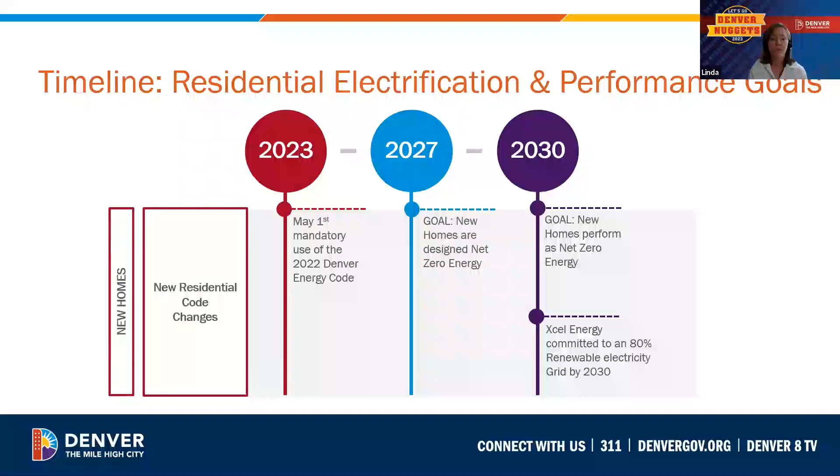You will find the 2022 Denver Energy Code at denvergov.org/buildingcode. A package of proposed changes to the code is posted there. It's anticipated to get City Council approval later in June, now scheduled for the 20th. The updates are primarily housekeeping in nature, and this presentation has a preview. Please do check back to the website for the latest code and updates to resources.

The Denver-specific ComCheck and ResCheck are anticipated to be available in fall of 2023. Another place where you'll find resources is at the Net Zero Energy Hub at denvergov.org/energycode. This has a recording of this presentation, as well as other resources for specific provisions, compliance options, and other training materials. More resources are being added, so please be sure to check back.

So tips for referencing the code: you're going to hear us use a single reference to a code section in the 2022 Denver Energy Code. This is because the 2022 Denver Building and Fire Code adopts the base code as reference. It's good practice to check Denver's code first to see if there are additions, deletions, or modifications to a section, and then also reference the base code. Also, Chapter 11 of the Denver Residential Code is replaced in its entirety by the residential provisions of the 2022 Denver Energy Code.

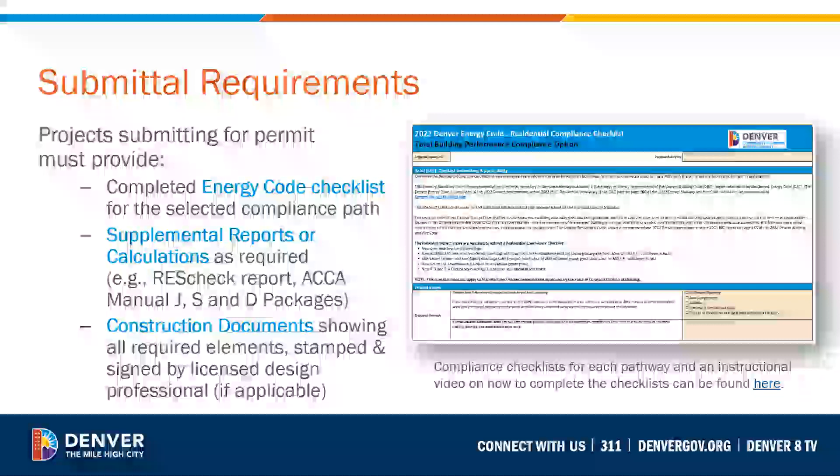Some of those submittal requirements are these compliance reports that could be your RES Check report or cost compliance report or energy rating index compliance report, as well as your HVAC design documents, your Manual J, S, and D. In addition, your construction documents need to be complete and house all of the required elements, and also be stamped by a licensed design professional.

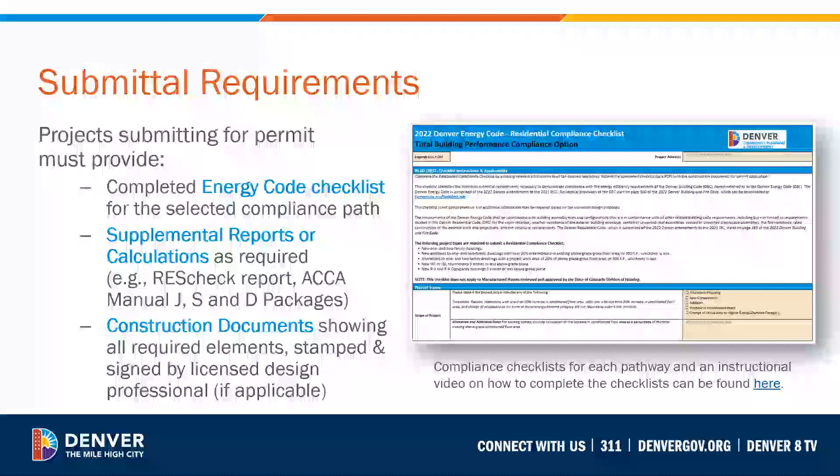Some of those additional compliance requirements that have to be on those construction documents would be, for example, a depiction of the building thermal envelope, air sealing details, and those types of things that we'll be talking about in more depth in the upcoming inspection and contractor trainings that start off on June 22nd and also on June 29th, pretty much at the same time that this presentation happens, around 1 o'clock. So make sure you sign up for those and listen to them.

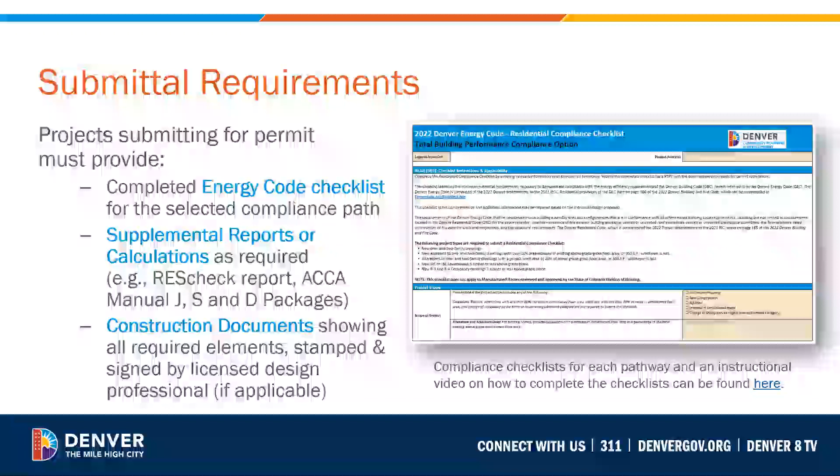Even if you aren't a contractor or an inspector, it'll give you a better idea of the full scope of inspections and requirements needed on your construction documents. Now, before we get to that, I wanted to note that the Denver Energy Code amendments now better define what an approved third party is. An approved third party is allowed to inspect your project, and if you choose to use a third party, you're now eligible for a discount of $150 on your permit fee. Third parties are most often used when demonstrating compliance using the performance option of the code, because compliance reports have to be turned in not only for the building permit, but also to issue the certificate of occupancy.

These compliance reports use the specifications and the building performance testing data that are actually achieved in the field in a second energy model to create what we call the confirmed compliance report that you need to turn in for that certificate of occupancy. We'll be discussing this all in a lot more detail during this presentation.

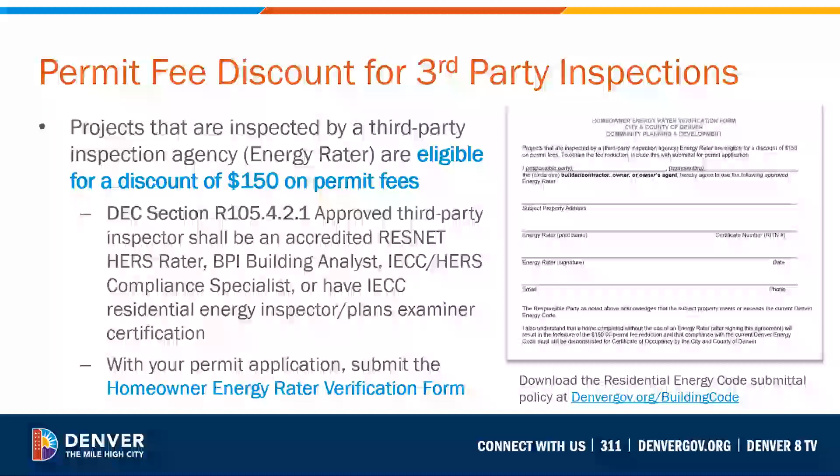Those wishing to be an approved third party need to contact the city of Denver, and those projects wishing to do the energy code inspections through a third party will need to submit a document called the Homeowner Energy Rater Verification Form with their permit application. A picture of that document, the Homeowner Energy Rater Verification Form, is shown on this slide.

Now, those construction documents, again, are documents that the plan review team utilizes to help guide the inspection process. So a lot of the information on those construction documents is included in the permit scope of work text box for the inspectors that go out into the field. The documents need to include the compliance pathway, for example, so that can be noted in the scope of work text box notation, so that the field inspection team knows exactly how to inspect that home and what to inspect it for.

Some of the additional information that needs to be on those construction documents, for example, if you're using the prescriptive pathway for compliance, would be additional energy efficiency packages, and regardless of the compliance pathway, whether you're putting renewable energy systems on the house, and whether that house or property is an all-electric property or not.

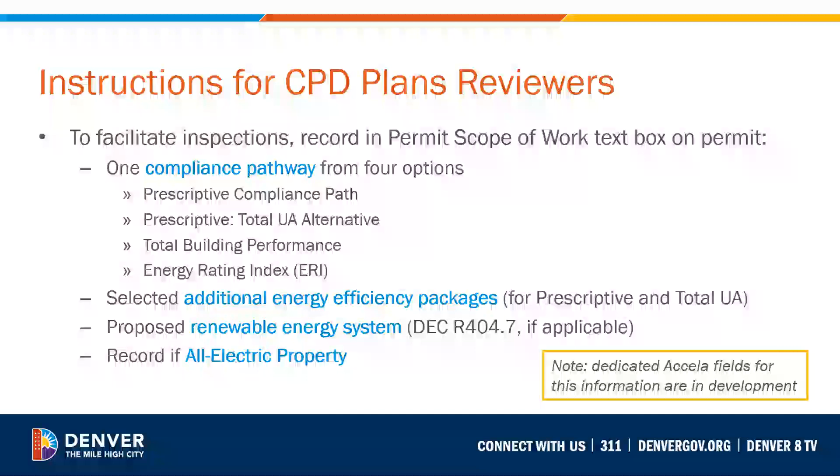Because the building performance options utilize an energy modeling process, we're going to talk a little bit more in depth about what energy modeling is and the result of energy modeling, which is these trade-offs, what they are and how they actually work.

There are a number of energy modeling softwares available that you can use to demonstrate compliance with the total building performance pathway and also the energy rating index, or ERI, compliance pathway. What you need to know is that ResCheck is not one of them, as it can only be used to model compliance for the total UA alternative compliance option.

You also want to note that you're likely to be confused a little bit when you enter the ResCheck software because they have this kind of quasi performance compliance option. But I want to be really crystal clear that that performance compliance option within ResCheck does not model for the total building performance approach or the energy rating index compliance approach. So you want to be sure to stay away from that if you're choosing these compliance options.

There's another software out there called Energy Gauge that can do this modeling for total building performance and energy rating index. But that software is really only used in Florida and some of the southeastern United States, and it's really unlikely that you're going to see it in Colorado.

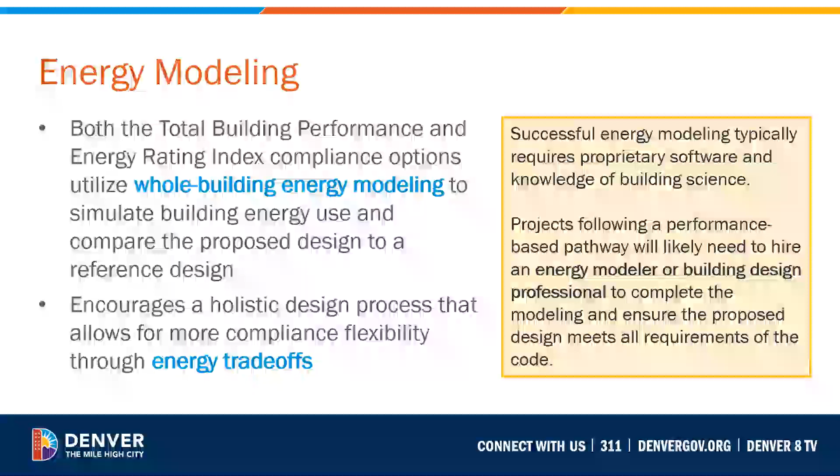The energy modeler who performs this will probably be an approved third party, and depending on the performance compliance option you choose and the software used, it will most likely be an energy rater.

These trade-offs refer to putting more into one assembly so you can put less into another, while keeping a balanced scale or energy budget that is deemed compliant with the code. When using performance approaches, you're allowed to trade off more things than you normally would with prescriptive approaches.

The area weighted U value prescriptive approach does allow you to trade off U factors and R values, but the performance approaches not only allow that, they also allow you to trade off air tightness, duct leakage, and systems and appliance performance, depending on the approach you're trying to achieve.

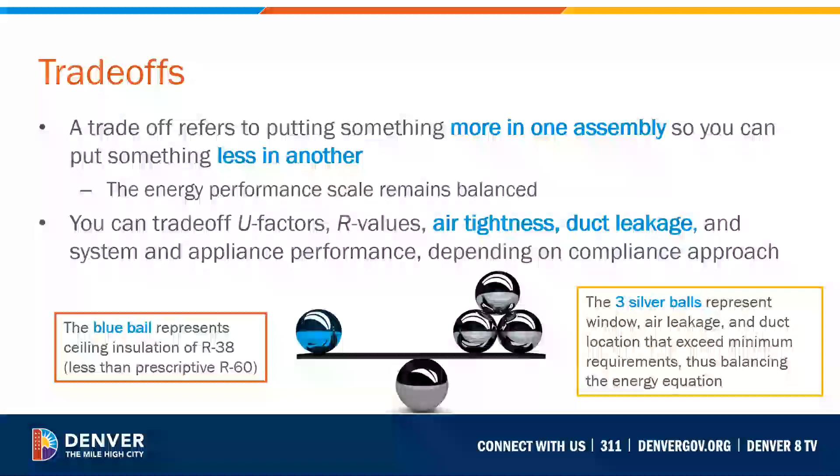When doing these energy models, we use software that describes the thermal building envelope and its delta T location to ambient air or dirt. The energy modeler starts by doing a takeoff of the building and inputting the square footage of each building assembly into the software.

In essence, they're rebuilding the house within the software, demonstrating where each assembly is placed with respect to its delta T location, in order to describe where the heat loss or heat gain is happening within that building.

When we talk about heat loss and heat gain, we're talking about the direction of heat flow. Heat flow always happens from higher concentrations to lower concentrations—you can think of it as from more to less, or from hot to cold.

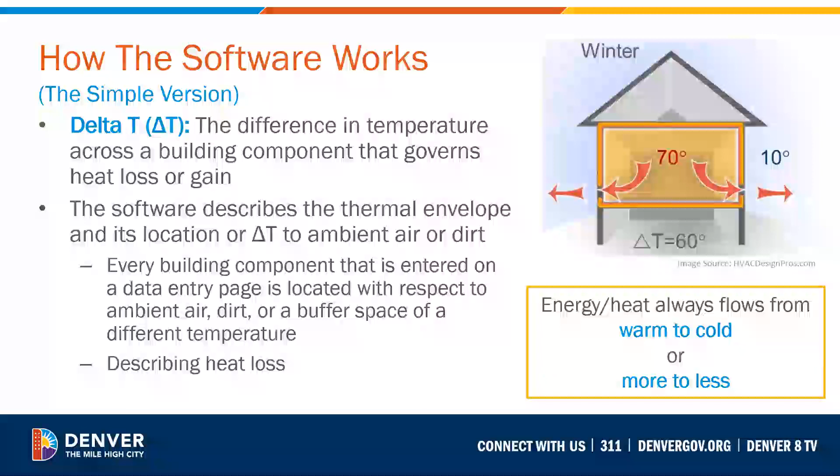In this way, the energy model describes and calculates the heat loss and heat gain through the building's thermal envelope for the entirety of the building being energy modeled.

Within the energy model, after you've built the house in there, the software takes over—it takes that geometry and builds two houses that are geometric twins of each other. One is called the reference home, and the other is called the rated home.

The rated home could also be called the proposed design or the builder's house. Because these two houses are geometric twins, the rated home is compared to the reference home, which is defined as a house with a standard set of specifications that generate a specific, consistent, and quantifiable amount of energy performance equivalent to code.

So the reference home is overlaid with the R value and U value specifications that are equivalent to code compliance.

The rated home is overlaid with the specifications that the builder and design team want to use, and they compare the rated home to the reference home to see if it's equal to or better than in performance. There are a variety of different metrics that can be used to determine if it's equal to or better than.

And that's ultimately what we're going to be getting at in each of the performance compliance options here. Now, there are a variety of different reference homes out there, and these softwares can demonstrate compliance with a lot of these different performance options or different performance pathways through the code.

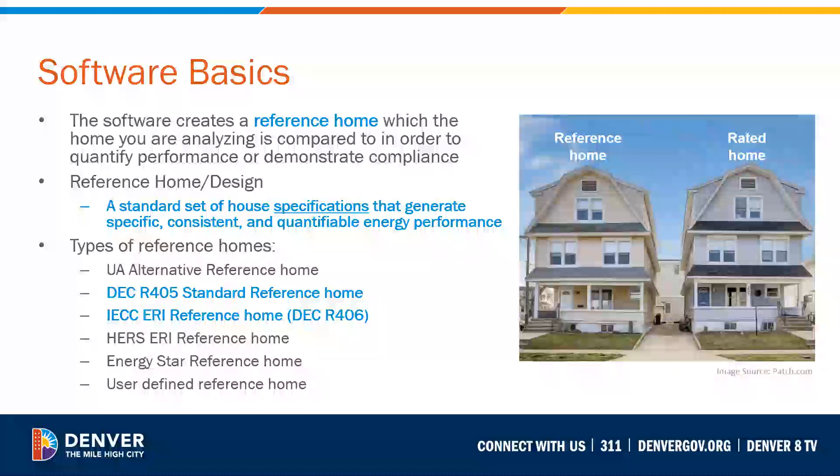But remember that if you're using the area weighted U value energy modeling approach, you can only use the REScheck software. That's the prescriptive compliance option that uses a software modeling approach. And if you're using the total building performance approach or the R406 energy rating index approach, you can use either the REM-rate software or the Ekotrope software or some of the other softwares that are out there to demonstrate compliance there.

Now, ultimately, this process creates a whole building or holistic energy model that helps us better understand the building science that's wrapped into the energy code, which helps us and allows us to perform greater trade-offs and gain more flexibility in how the home is designed and specified and ultimately built in relationship to the code specifications and compliance with the code.

So when we talk about flexibility that's built into the code, we're talking about using these performance approaches and the energy models to be able to determine that flexibility in how we design and specify the building thermal envelope assemblies.

Now we're going to jump into the first of these options here. You have the option to use the total building compliance option here. This section is in R405, and it establishes a criteria for compliance using total building performance analysis.

The analysis only includes heating, cooling, mechanical ventilation, service water heating use, and building assemblies or components that directly affect the energy performance of the building's thermal envelope from a heating, cooling, ventilation, and service hot water perspective there.

Now, this compliance option does not include mechanical or solar trade-offs. However, it offers more flexibility than the UA alternative because you can trade off more than just R values and U values that are allowed in that prescriptive energy modeling approach.

As you can see in the pie chart on the right of this slide, heating, cooling, and water heating are the largest energy demands of a home, and this is why the code concentrates on these areas and their impact on the building thermal envelope. So the code is always trying to protect the performance of the building thermal envelope there.

Within the energy model itself, two houses are developed that are geometric twins of each other. We have the reference home that I talked about before, and the reference home specifications for this compliance path are actually defined within the body of the energy code in table R405.4.2 parentheses 1 in the IECC.

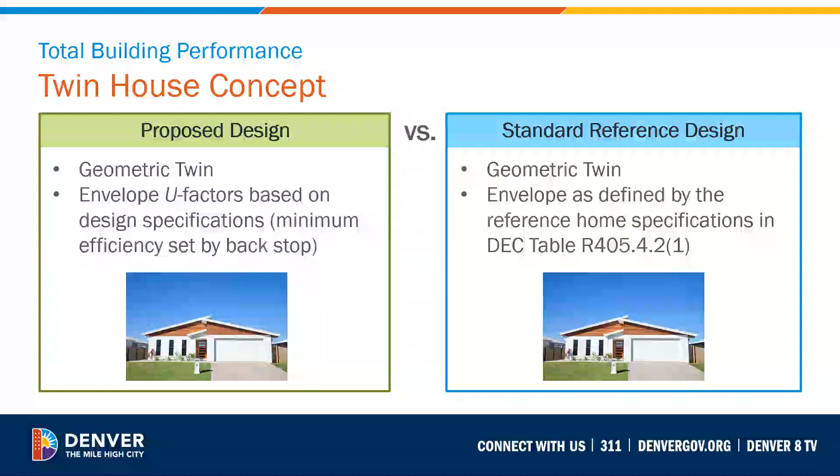For the total building performance compliance approach in the 2022 Denver Energy Code, it requires that all electric homes be 5% better than the standard reference design, and that all other buildings, or non-all electric buildings, in other words, be 18% better than the standard reference design.

The metric used for compliance to ultimately determine if the proposed design is better than or equal to that 5% or 18% is annual energy cost. So the result of the energy model is what we call a cost compliance report that will show you if the house is better than 5% or 18%, depending on how your project is defined there. And I'll show you those reports here in just a bit.

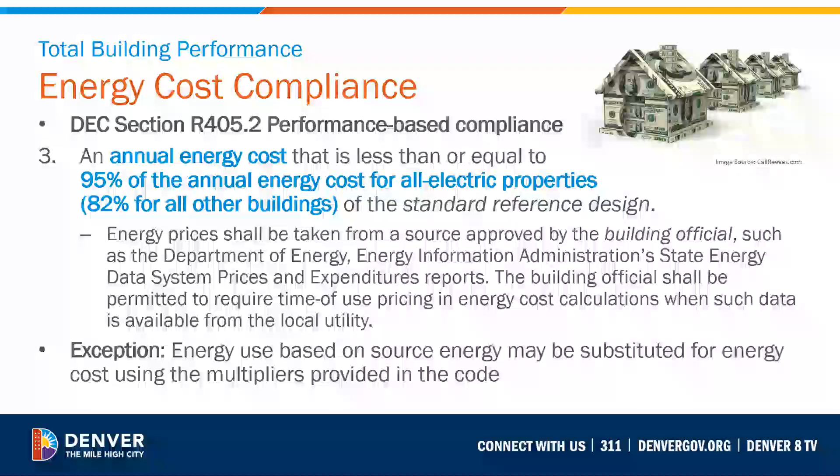The standard reference home design is what we're ultimately looking for here, and it's what you must be 5% or 18% better than, depending on the building and if that building is an all-electric property or not. Remember that the reference home design is printed in a table within the body of the 2021 IECC, so you can go take a look at it if you'd like to. The reference home is this standard set of house specifications that generate a specific, consistent, and quantifiable amount of energy use that is deemed to be compliant with the code.

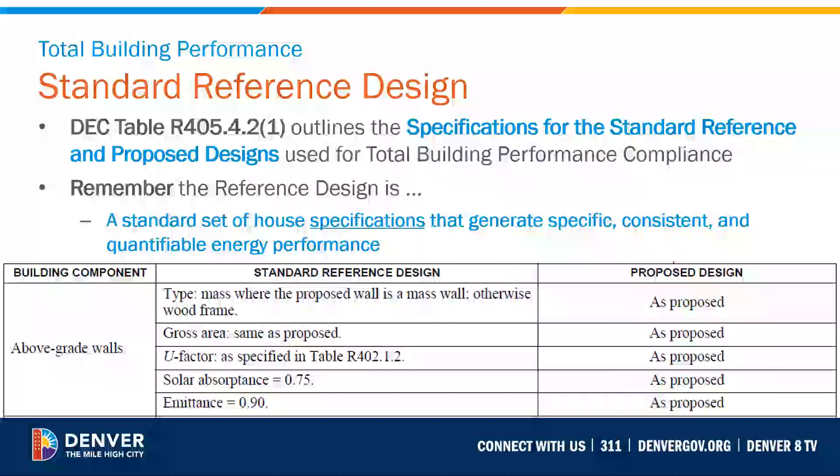This is what we're comparing our proposed design or builder's house to. So the builder or proposed design specifications must be chosen to demonstrate compliance that is either 5% better than, or 18% better than, depending on the project type that you're proposing to build to, and ultimately better than the reference home by those percentages.

So what does this mean for your project? The proposed design must first meet the requirements in table R405.2 that I'll show you here in a second, and comply with these backstops, meaning that you can't trade off below the building thermal envelope requirements described in the 2009 IECC. Now, this backstop ultimately and in reality is irrelevant to the Denver Energy Code, because the Denver Energy Code is using the 5% and 18% cost compliance requirements, depending on if you're building an electric home or a non-electric home.

But you want to be sure that you are specifying something that is better than the 2009 IECC R values and U values in those tables, just to ensure that you're not going to have any issues when it comes to looking at this compliance and the energy modeling that's happening there.

So lastly, you have to comply with the cost compliance requirements that help to incentivize all-electric properties. You can see that the non-electric property has to be 18% better than the reference home, versus the all-electric property that only has to be 5% better than the reference home. Therefore, they've set this up to incentivize people to seriously look at building all-electric properties within the city of Denver.

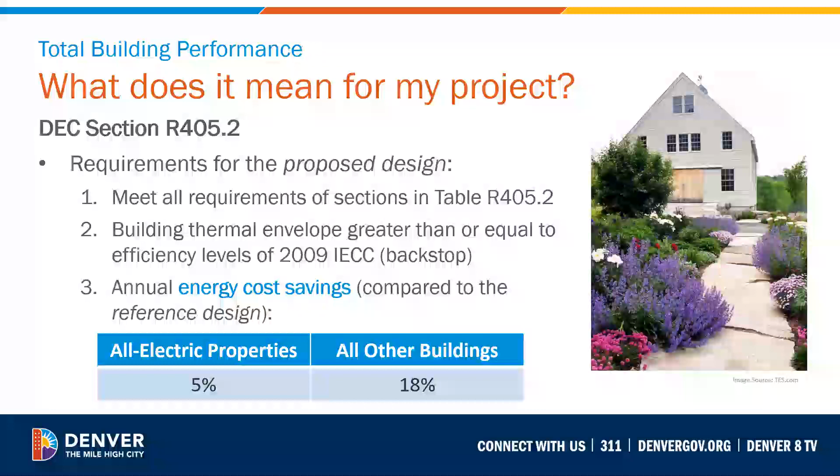So regardless of the compliance approach used for the project, there are these additional requirements from sections R401 through R404 that must be met. The 2021 IECC removed the language that describes requirements as prescriptive or mandatory, and they're now just listed out as requirements, per compliance option. In essence, you can think of them as mandatory requirements that primarily address installation-specific issues that deal with efficiency in the code.

Now, for the total building performance compliance option, they're listed in this requirements table. This is the R405.2 table here. We'll be speaking to these requirements in more depth again in the contractor training, which I recommend you take a listen to, or join us on June 22nd and June 29th.

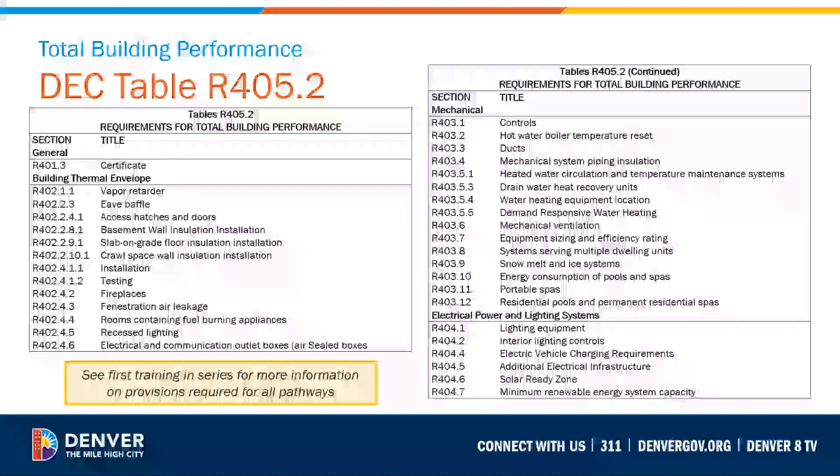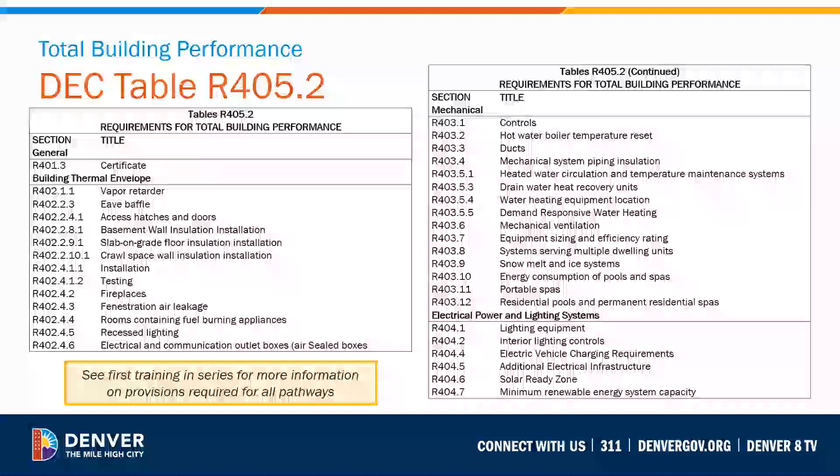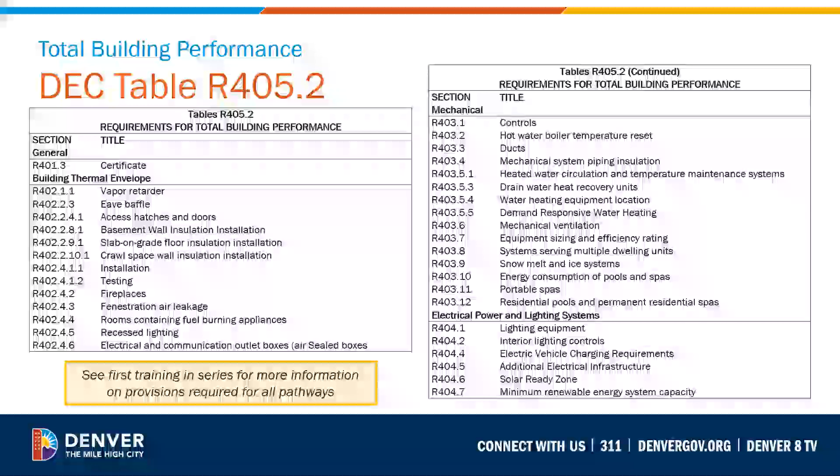Now, if you look at this table in depth, you can see why they got rid of the mandatory and prescriptive language. If you look in the left-hand column, you'll see attic eave baffles. Attic eave baffles used to be described in what was called the prescriptive section. So some smart aleck really thought that if they were doing a performance approach compliance for their house, and it had a ventilated attic, that they weren't required to install attic eave baffles because it didn't say mandatory on it. Now it's just really clear by using this table that all of these things are required if you're doing an assembly that would need attic eave baffles, like that ventilated attic, for example.

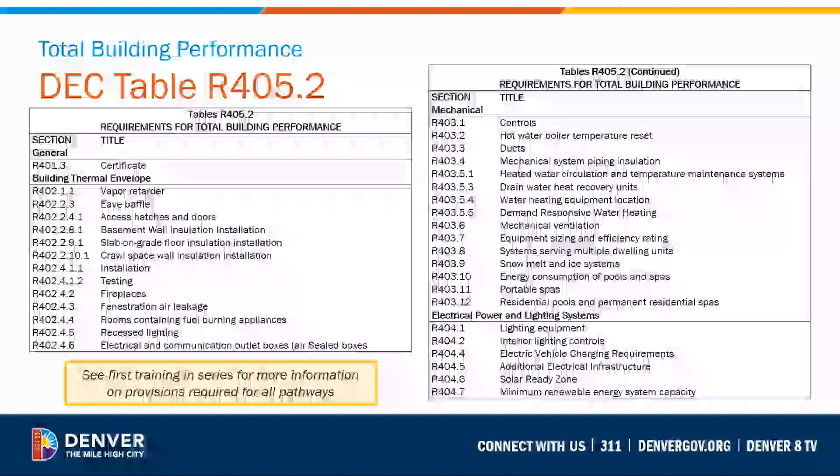The other thing I want to touch on again is the backstop. It's used in the total building performance compliance pathway, and it states that the building thermal envelope shall be greater than or equal to the levels of efficiency in the 2009 International Energy Conservation Code. Again, the Energy Code uses the backstops to protect the performance of the building thermal envelope from excess trade-offs. As I said before, it's unlikely that this will become an issue since your cost compliance requirements are 5% better than or 18% better than the reference home, using the R values and U values or U factor tables from the 2021 IECC. But regardless, it's smart to keep this in mind in case there's some unforeseen trade-off that complies on paper but may not comply in reality in the field during inspections.

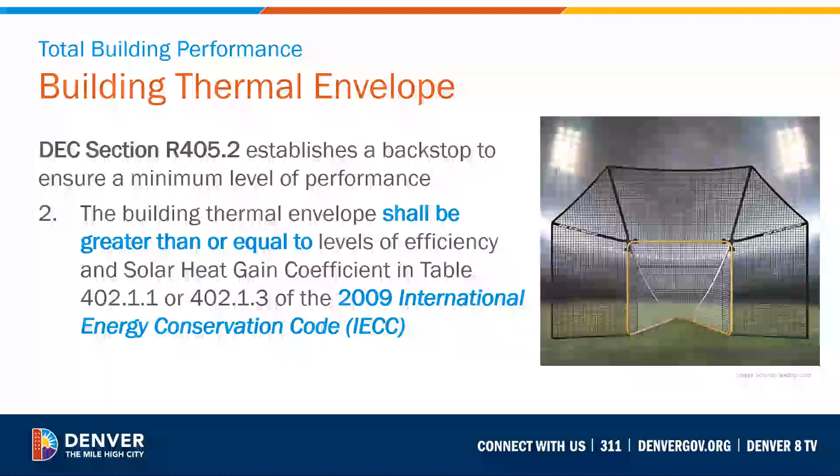I also want to point out that these additional efficiency packages in section R408 are only required for projects following the prescriptive compliance pathway, and are not required when using either the total building performance or the energy rating index compliance pathways.

The reason for this is that the additional efficiency that has been built into the code has been built in directly into the performance requirements for both the total building performance and energy rating indexes. Remember, in the total building performance, this 5% better than and 18% better than the reference home is a demonstration of how they've built this in already into the compliance pathway.

Note that the original printing of the Denver Energy Code in section R401.2.5, in the requirements table for both the performance approach and the energy rating index approach, these requirement tables R405.2 and R406.2 point to a requirement for additional energy efficiency, but that was a mistake that was written into the code and it's been removed. There's now an errata that's been issued to show clearly that that is not a requirement. The errata is supposed to be published soon on the City of Denver's website, and it's recommended that you download it and reference it when determining compliance for your project so you understand everything that's actually required.

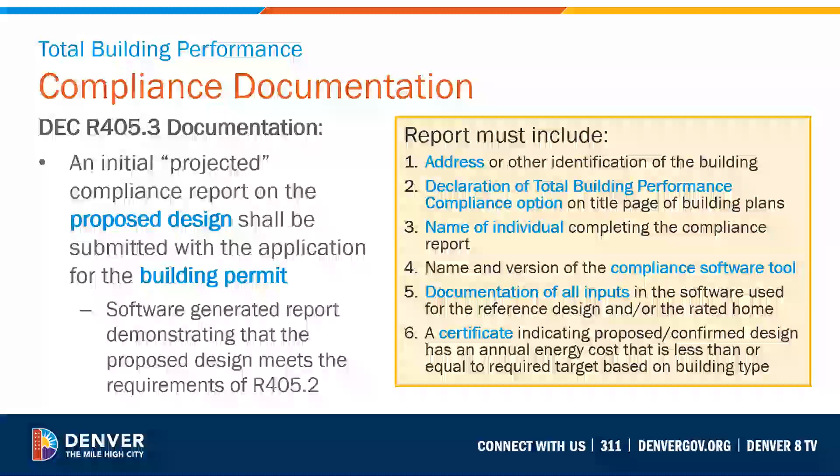Other things that have to be on the compliance report are shown here in the yellow box. Most importantly, a certificate indicating that the proposed and confirmed design has an annual energy cost that is less than or equal to that required by the Denver Energy Code, which is the 5% better than for all-electric buildings and the 18% better than the reference home for non-all-electric buildings. Also, we want to note that this has been set up to incentivize all-electric buildings.

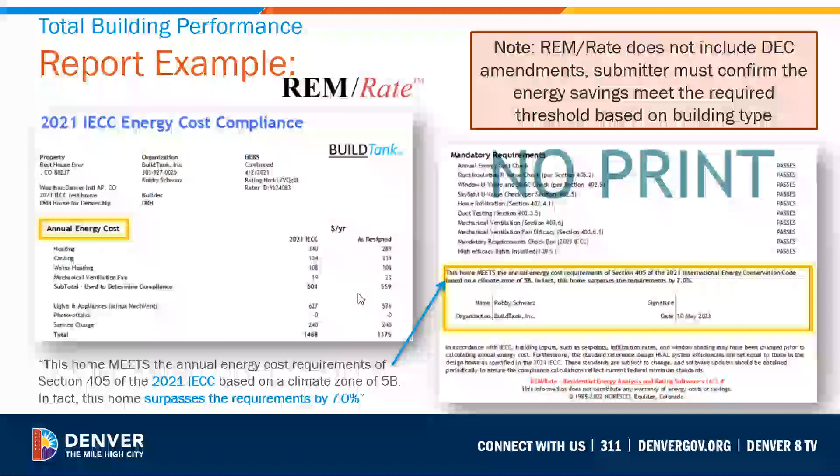Okay, so here's an example of a cost compliance report from the REMrate software. Note that this example home passes the 2021 IECC by 7%. Remember that this meets the requirements for all-electric properties within the Denver Energy Code, but would not meet the energy savings requirements for mixed fuel or non-all-electric homes. Also note that neither the REMrate nor the Ekotrope software has been modified to include the Denver Energy Code amendments. So this is one fundamental reason why the 5% and the 18% levels of performance have been set within the Denver Energy Code: it allows the use of software without having to customize it to a code adoption and its amendments. In addition, the Denver Energy Code amendments to the cost compliance requirements provide better equivalency between compliance options, and help the City of Denver meet its zero carbon and zero energy goals.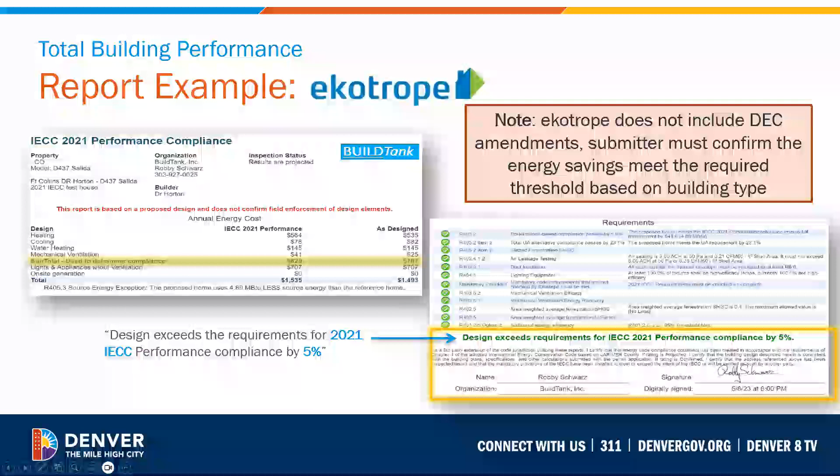An additional compliance report is required when using the total building performance compliance option. This actually requires two separate reports that can be printed out from these softwares: one that outlines the inputs and specifications used to create the reference home, and another that outlines all the inputs and specifications used to build the rated home or the proposed design.

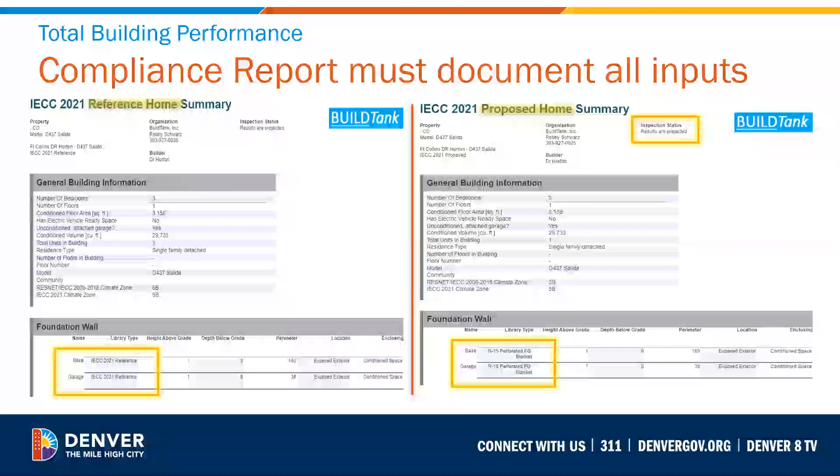These reports shown here are from the ekotrope software and also need to be labeled as proposed or confirmed. You can see in the upper right-hand corner of the document on the right that it's showing the results are from the projected or proposed design. I should point out that projected has the same meaning as proposed.

In addition, the R401.3 certificate can be printed out from these softwares. This report must be posted in the house as part of the compliance reports needed to obtain the certificate of occupancy. Notice that on this slide, the report on the right was not generated by a software.

When using the prescriptive R-value or U-factor compliance option, this option does not use a software, and therefore you don't have the option of printing out this R401.3 certificate from a software. Therefore, the certificate itself has to be hand generated. This particular one uses Microsoft Word, but you're likely to see a lot of different options out there to generate this certificate. In fact, the City of Denver has a template for the R401.3 certificate that you can use to generate the certificate and turn it in to the City of Denver and post it in the house.

Note that section R401.3 states specifically what has to be on the certificate. So if you do generate it yourself, you want to make sure that you have all the requirements that need to be listed on that certificate listed on the certificate.

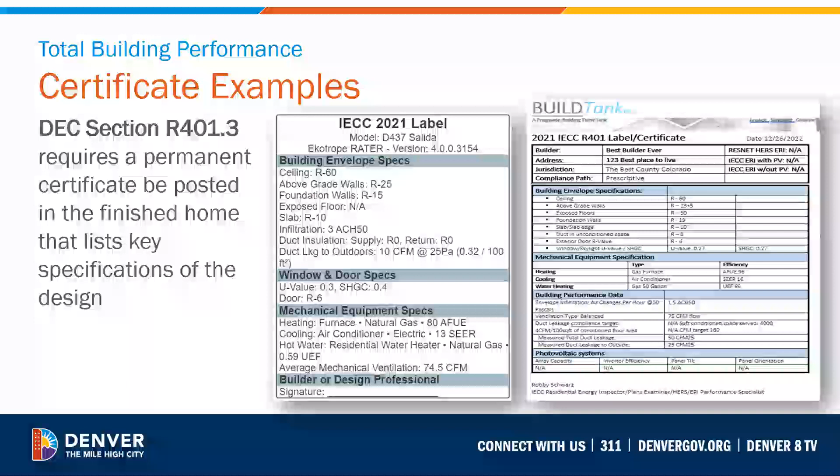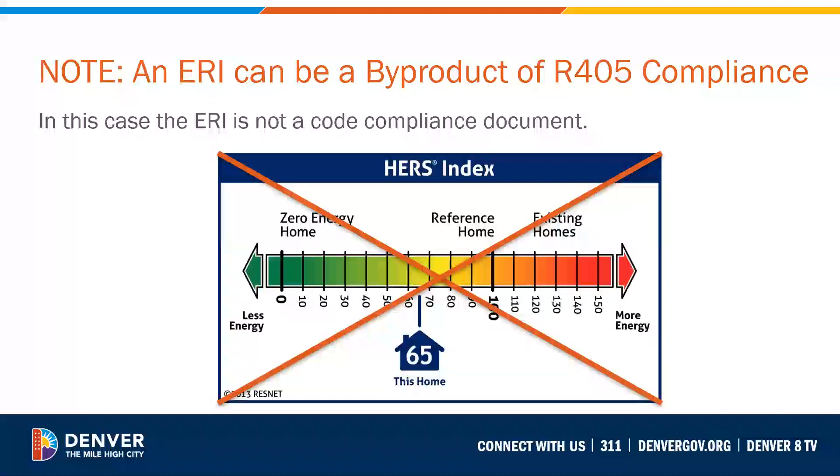When you're utilizing a software to do the building performance approach for compliance, it's likely that software can also be used to do the energy rating index compliance, or just generate an energy rating index score. I want to be clear here: if you're choosing to use the R405 building performance compliance option, you should not turn in anything that has an energy rating index score on it. It just confuses everybody and creates confusion about which compliance option you're actually trying to use. So again, do not turn in anything that has an energy rating index on it if you are choosing to use the R405 total building performance compliance alternative or pathway.

Sorry about that, you might hear a phone ringing in the back.

Upon completion of the building, a confirmed compliance report based on the confirmed condition of the building has to be submitted to the code official before a certificate of occupancy is issued. The confirmed compliance report is your final site-specific code compliance report that includes any information obtained during the inspection process of the home, such as the actual blower door test or duct leakage testing results.

It can also include any insulation specifications that may have changed between the proposed design submission and the final confirmed report for certificate of occupancy. Generally speaking, if you install more than you specified on the proposed compliance documents, you'll be okay. But remember, if your specification changes a lot from what you turned in at submission to the final, or includes specifications that are less than the proposed design, you may run into a big problem at final. So you want to follow your design as much as possible, although we know things sometimes change during the construction process. You'll want to bring that up as soon as possible.

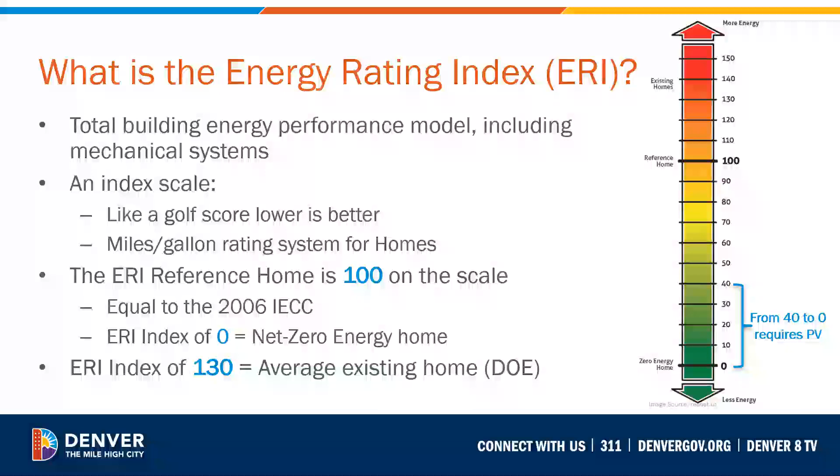I've also seen houses that perform really poorly. I think the worst house I've seen scored about 300 points on the energy rating index scale, significantly worse than the average existing home in the marketplace.

The energy rating index was first added to the IECC compliance option in 2015 at the International Energy Conservation Code development hearings. They used the name energy rating index, or ERI, because the term HERS, or home energy rating system, is a proprietary term, and proprietary terms can't be used within the body of the code. However, in the 2015 IECC, the energy rating index score was developed using the ResNet HERS standard, even though it was not specifically referenced in the code, because the reality was there was no other alternative to use.

Between the 2015 IECC and the 2018 IECC, the organizations ANSI, ResNet, and the International Code Council created the ANSI Standard 301, which outlines how to develop an energy rating index score. The energy rating index became non-proprietary because of this ANSI Standard 301, and ANSI Standard 301-2014 was adopted for use in the 2018 IECC. The ANSI standard is now used to create both the IECC and the ResNet HERS energy rating index score.

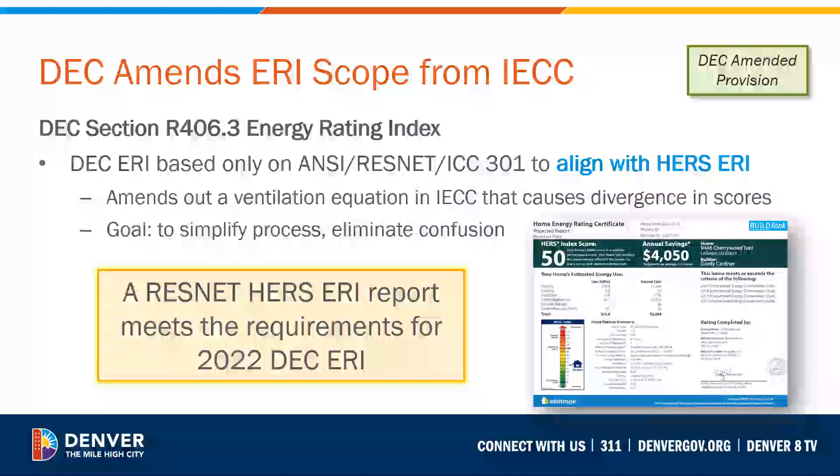So to be really crystal clear, the ResNet HERS energy rating index score is the compliance score used by the Denver Energy Code. I just want to repeat that one more time: the ResNet HERS energy rating index score is the compliance score used by the Denver Energy Code.

So how is the energy rating index score developed in the software? Remember that within the software we have two houses that are geometric twins of each other, created after we've done a takeoff and built that house in the software. You have the proposed design, which is compared to the reference home. The reference home is overlaid with the specifications required by the ANSI Standard 301, which is equivalent to the performance created by the 2006 International Energy Conservation Code.

The proposed design uses the specifications that the builder or designer has specified for that house. The objective is to get an analysis to benchmark the proposed design on the energy rating index scoring system in relationship to the ANSI 301 reference home, that 2006 IECC house. In other words, we want to know does the proposed design perform better or worse than the reference design, and what is its actual score?

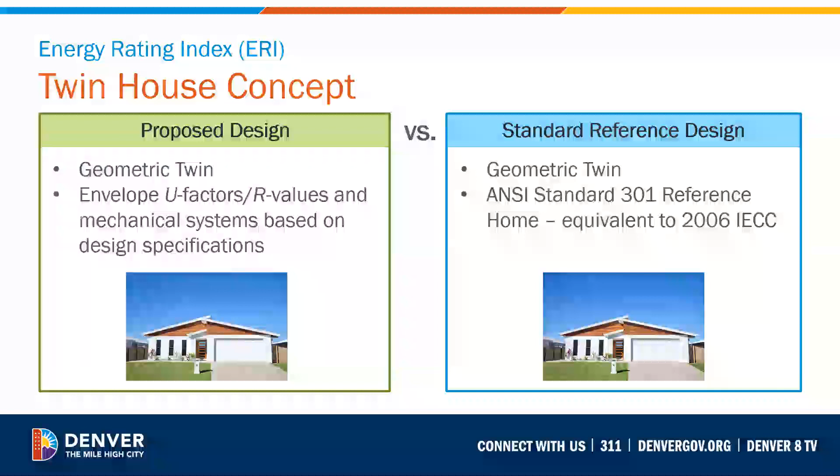So what this means for your project is that the specifications for your proposed design need to perform significantly better than the 2006 IECC. In fact, they need to perform well enough to achieve an energy rating index of 55 or less for an all-electric home, or 50 or less for all other properties or non-all-electric homes. In addition, your project will have to comply with the requirements listed in Table R406.2, which are specified in sections R401 through R404 that all compliance options have to comply with.

So remember, I said that if you maximize the envelope and mechanical efficiencies in the house, you can only get to an ERI score of about 35. The remainder of the pathway to zero is achieved by adding renewables, such as PV panels. Because of this fact, the Denver Energy Code set the required energy rating index scores at 55 or less for all-electric homes and 50 or less for non-all-electric homes.

Also remember this means you have to achieve those energy rating index scores without including renewables in the energy model. So before renewables are added to the energy model, you have to achieve your 55 or your 50 or better, depending on the type of project you're building. This creates a natural backstop to protect the efficiency of the building thermal envelope and offers a more defined path to meet the city's zero energy goals, as well as room to lower the energy rating index score requirements in future code cycles in order to ultimately meet those zero carbon and zero energy goals in the future.

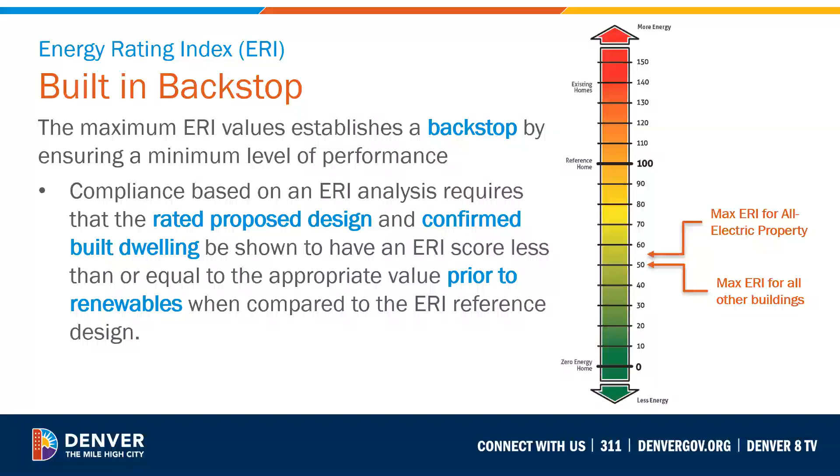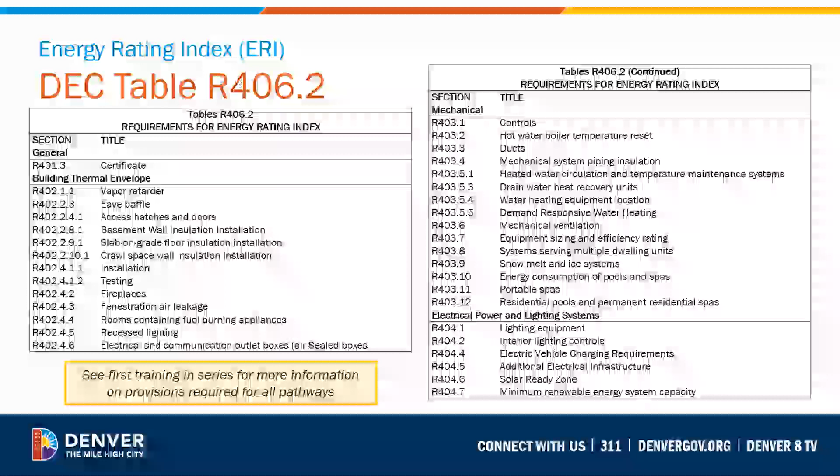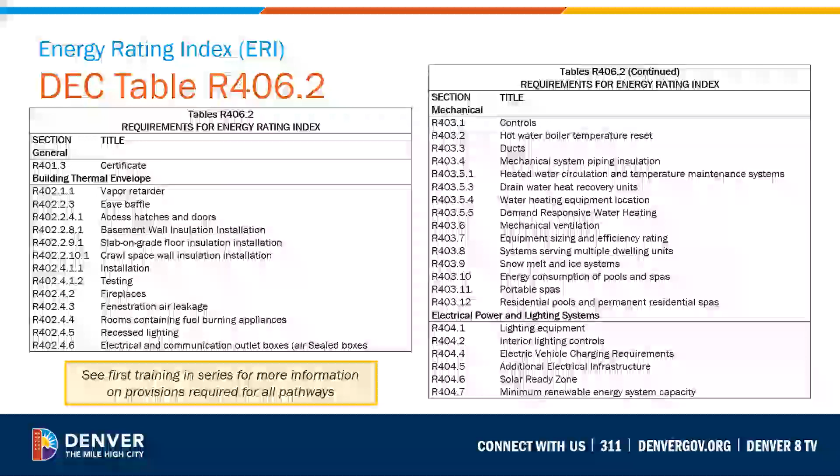Here's the R406.2 table, which lists all the requirements that are applicable in sections R401 through R404 for the energy rating compliance pathway. Remember that the 2021 IECC removed the language that described requirements as prescriptive and mandatory. They are now just requirements.

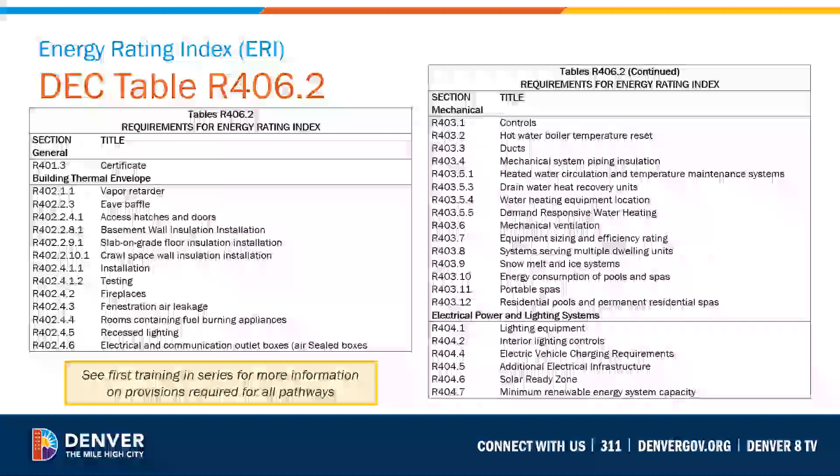You can think of them as mandatory requirements that primarily address installation of specific efficiency measures embodied within the language of the code. We'll be speaking to these requirements in more depth during the contractors training, and I encourage you to take a listen to those trainings happening on June 22nd and June 29th, or listen to the recordings posted on the Denver website.

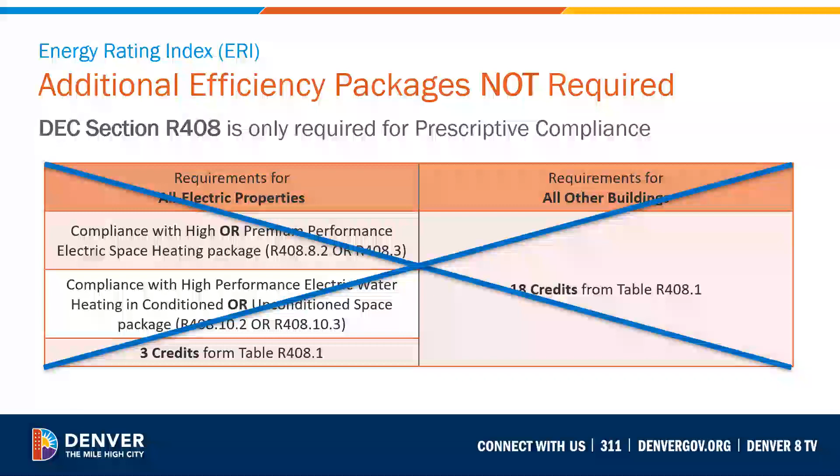Also, I want to remind you that the additional efficiency packages in sections R408 are only required for projects following the prescriptive compliance pathway, and are not required when using either the total building performance or energy rating index pathways. As with the total building performance compliance path, you'll have to submit a proposed design compliance report to obtain the building permit when using the energy rating index compliance option.

The reason for this is that the energy model is basically using assumptions such as how leaky the house is, because this information isn't available at the time you're permitting the house—the house isn't complete yet, and those tests haven't actually been done yet.

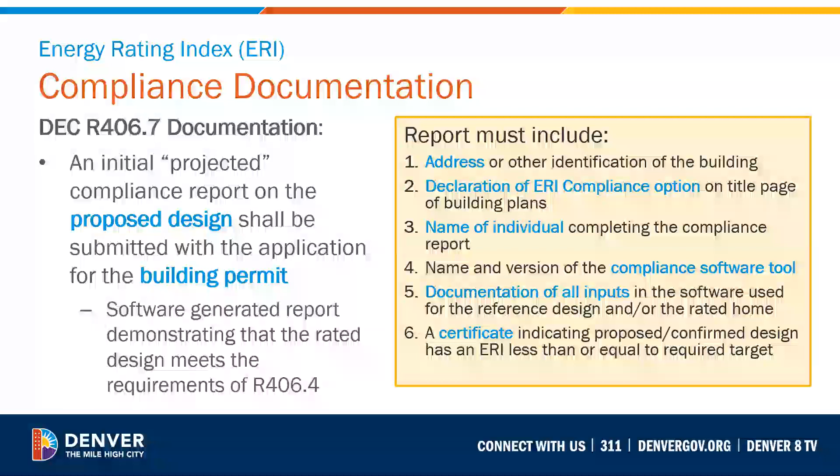The Energy Code actually calls out specifically what needs to be reported for permitting and to obtain the certificate of occupancy for both the performance compliance pathway and the energy rating index pathway. I recommend that you become familiar with those requirements.

The Denver Energy Code spells out that an approved third party will create the energy code model used for compliance under the energy rating index compliance pathway. However, compliance inspections for table R406, those requirements in sections R401 through R404, may be done by either the City of Denver or through an approved third party.

So to be clear, in order to create the confirmed energy rating index score and other compliance documents you'll need, the third party will have to inspect the home during the construction process. Therefore, you're going to have to make a choice, and it might be more streamlined or advantageous to only work with the approved third party for your energy code inspections.

However, you can opt to have the City of Denver do those inspections as well. But remember, the energy rater will have to come out and confirm what's been done in that house, and will be out there doing some level of inspection anyway.

In order to use the third party, you will need to submit a home energy rater verification form in addition to the other required permitting documents at permit submittal. A benefit of this is that you get a $150 discount on your permit fee.

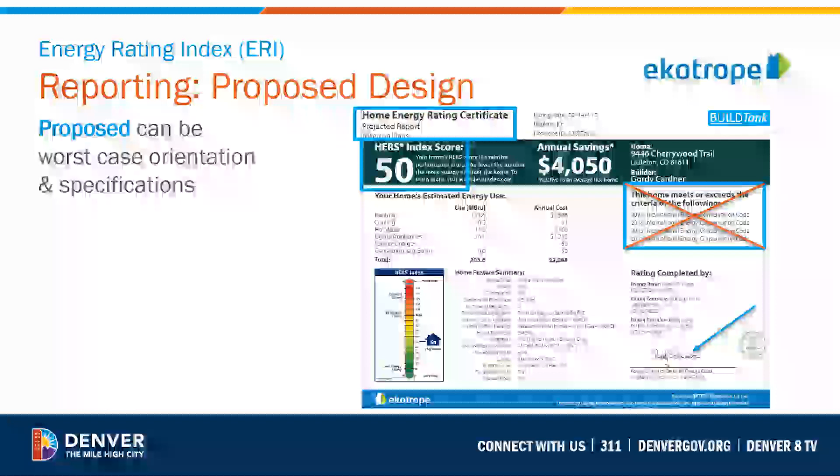Lastly, all the reports must be signed and include all the information required within the Energy Code, and those requirements are listed in section R406.7.2 that outlines all those things that need to be included on the compliance reports.

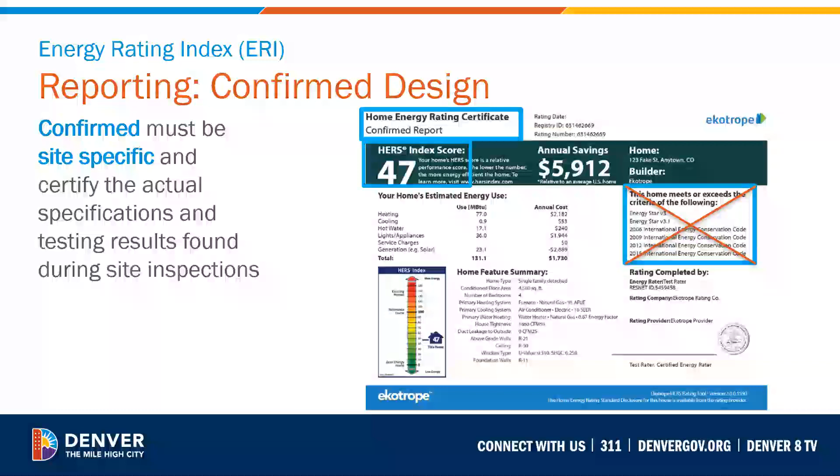So you want to make sure that you're picking the right certificate and you're using the HERS home energy rating score and the HERS home energy rating certificates within the software to turn in for compliance. And those certificates must be marked clearly if they are proposed designs or projected designs or confirmed design reports to get your building permit or your certificate of occupancy.

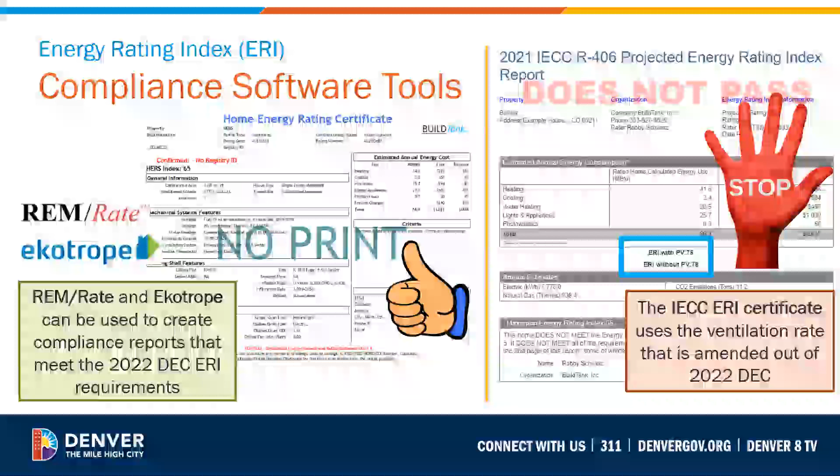Okay, so I think we have looked pretty well and in great detail at the energy rating index compliance option and the total building performance compliance options. And now I want to end our presentation by looking at some considerations for existing buildings.

The Denver Energy Code addresses additions, alterations, repairs, as well as change of occupancies in existing buildings in order to maintain and improve the energy efficiency of the altered existing building. It's likely that you will have to clearly define your existing building project in order to determine what you're actually doing with that project from a code perspective.

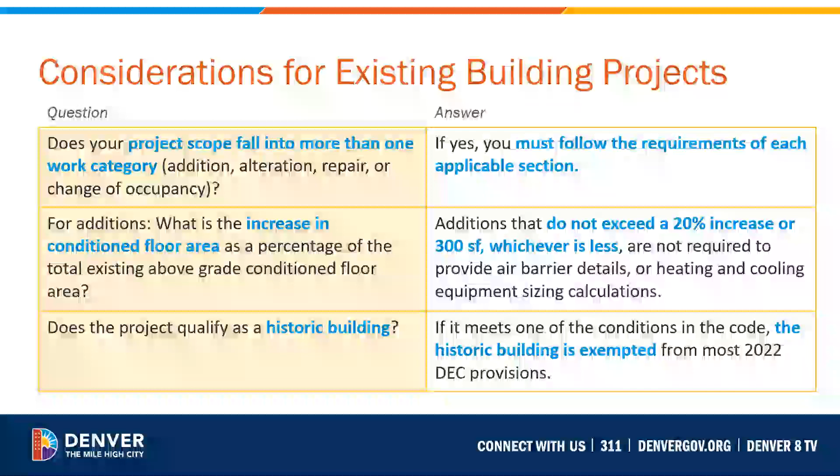Now, compliance with most specifications in the Denver Energy Code apply only to new construction, so ultimately compliance is simplified for existing buildings. One small exception to that is with regards to electric vehicles.

So let's say, for example, you're doing an addition, and that addition includes a new garage or carport, or even new on-site parking spaces. If any of those things are pertinent to your existing home project, you will be asked to comply with the electric vehicle charging requirements. Otherwise, many of the other requirements required in the Denver Energy Code for new buildings are not required for existing homes. But you want to make sure you're clear before you start your project what's required and what's not.

There are two types of additions defined in the Denver Energy Code for existing homes, and you'll need to determine which type applies to your project. Changes in space conditioning—when you're taking an unconditioned or low energy space and changing it to a conditioned space—is an example of the first type. This would be, for example, taking a finished or existing attic and/or a finished or existing basement and turning it into a conditioned space.

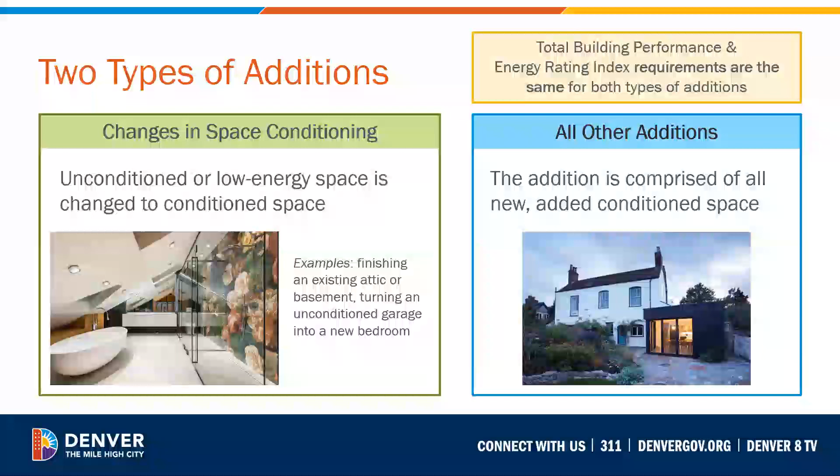There are two building performance options that can be used when you're building an addition. Remember, these options are in addition to the options we discussed in the prescriptive compliance presentation, so you'll want to review all the compliance options for additions when deciding how to proceed with your project.

The first total building performance option requires that the annual energy cost of the proposed design—including the addition plus the existing building—be 110% of the annual energy cost of the standard reference design for the addition plus the existing building. This option includes complying with all the requirements in the total building performance requirements table, the R405.2 table, and would require a proposed and a confirmed energy model on that house.

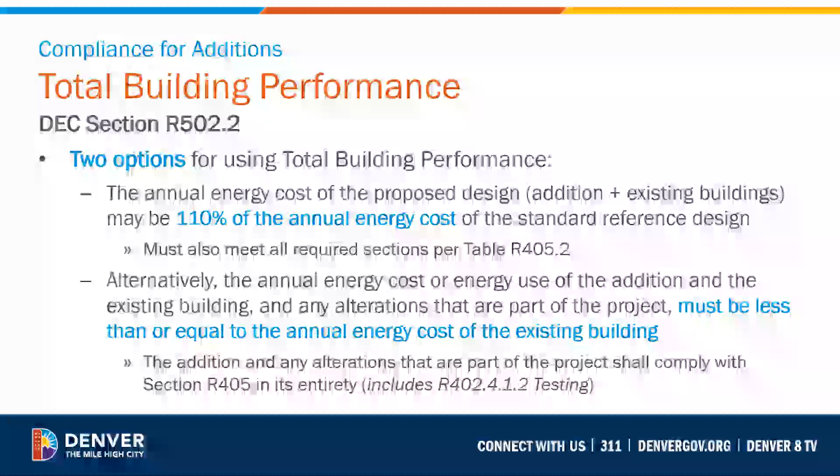The second total building performance option requires that the annual energy cost or energy use of the addition, the existing building, and any alterations that are part of the project be less than or equal to the annual energy cost of the existing building by itself. This would require an energy model of the existing building prior to any work performed, and also one after the addition has been constructed on that existing building.

You might also want to do a proposed energy model to better ensure that the home with the addition will be better than or equal to the existing building before the addition was added. This compliance option also requires that the addition and any alterations that are part of the project comply with all sections of R405, including the air leakage and testing options for that compliance pathway.

When using the Energy Rating Index compliance option for projects undertaking an addition, the Energy Rating Index of the addition, the existing building, and any alterations that are part of the project must be less than or equal to the energy rating index of the existing building.

So like the total building performance compliance option 2, which we discussed a minute ago, you have to comply in basically the same way, but you're using an energy rating index instead of a cost compliance report. This would ultimately require that an energy model of the existing building be done prior to any work performed on it and after the addition was constructed as well.

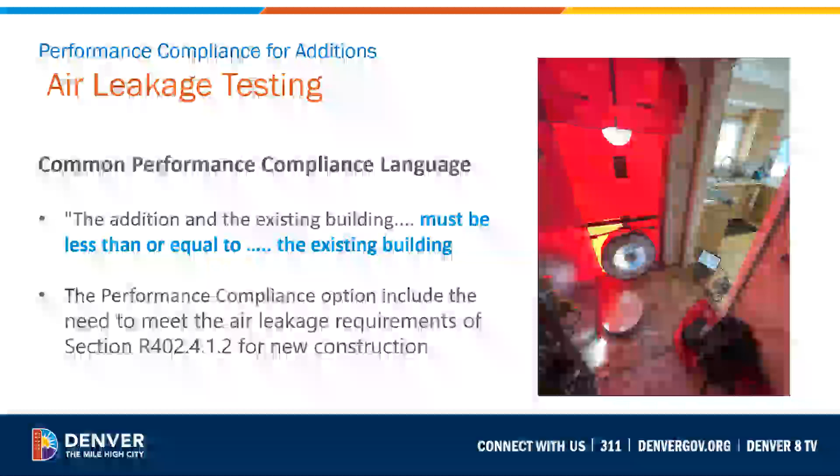So when we're talking about energy performance compliance here, you'll see this common language that the addition and the existing building must be less than or equal to the existing building. To accomplish this, the performance compliance options include the need to meet the air leakage requirements in sections R402.4.1.2, meaning you will have to do a blower door test on your existing building project if you choose to comply using either the building performance compliance option or the energy rating index compliance option.

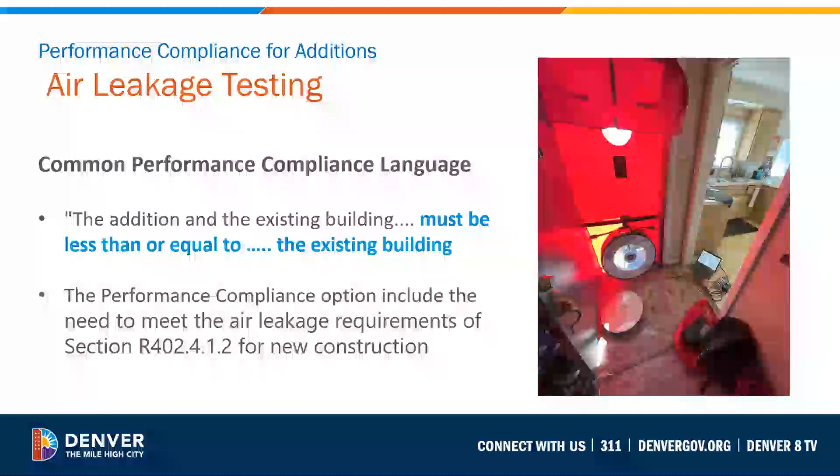I mentioned this before, but I want to mention it again here, that alterations and repairs must meet the prescriptive requirements outlined in the Denver Energy Code sections R403 and R503 and R504 respectively. Those are the existing sections in the existing homes chapter.

You'll want to review the previous trainings that covered the prescriptive compliance pathway in more depth, and those are loaded on the Denver website. Remember the importance of determining if your project includes an alteration, repair, addition, or change of occupancy before you permit your project. And if you need help figuring this out, you can reach out to the City of Denver directly.

Projects with a change of occupancy or use to the residential building must meet the applicable requirements of Chapter 5, as it will result in either an addition, an alteration, or a repair. If the change is from a lower energy demand category as defined in the IBC occupancies, it must meet all the requirements for new construction unless the change does not result in increases in energy demand.

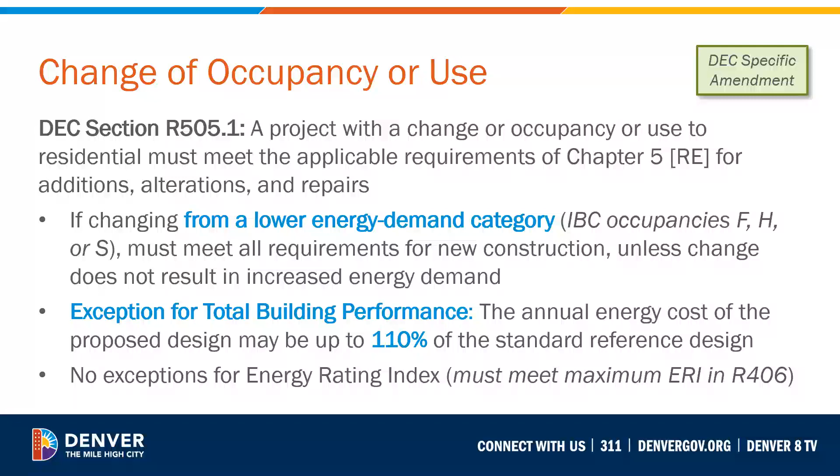If you decide to use the energy rating index compliance pathway, the project will have to meet the requirements of the energy scoring outlined in the R406 pathways, unless the change of occupancy is part of an addition, in which case the energy rating index must be less than or equal to the energy rating index of the existing building, as we discussed earlier.

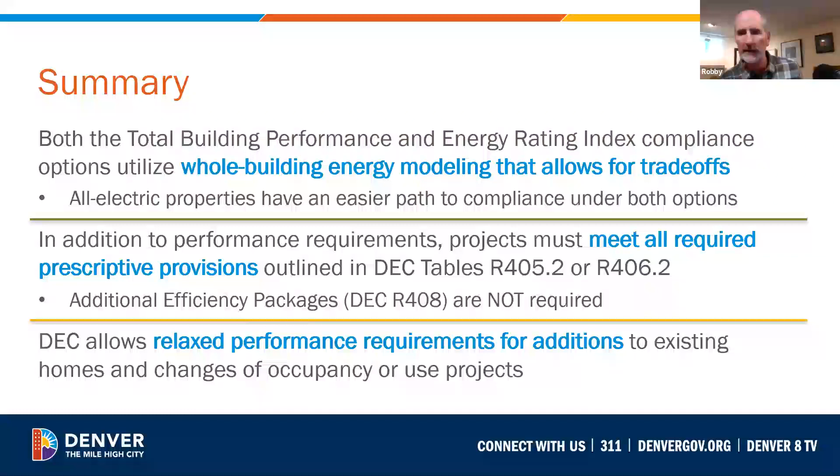Awesome. Thank you, Robby. Good presentation. I'm just going to jump right in because we have 9 minutes and quite a few questions. So I'm going to start with this one, and Rachel, hopefully you can help me out.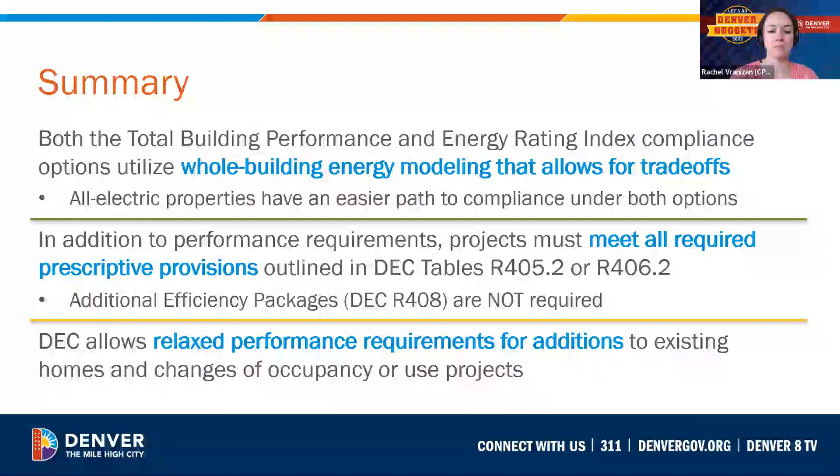If HVAC design is updated after initial permit application, say to add an ERV, does the building performance compliance report need to be updated and resubmitted? Short answer, yes. For both total building performance and ERI, you need to submit a compliance report at the beginning showing your proposed design, but also submit one at the end of your project showing the actual as-built conditions. This can capture any changes that happen in the field, just to make sure that the final design actually meets the requirements of the code. We will talk a lot more about the requirements for that final compliance report in the contractor and inspector trainings.

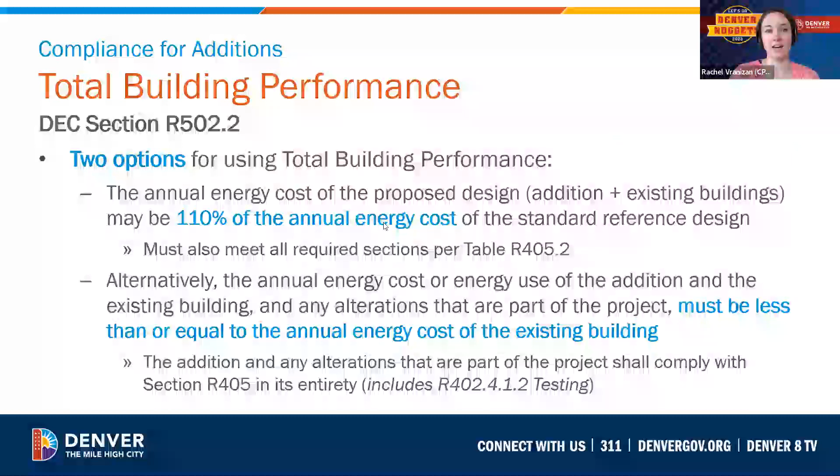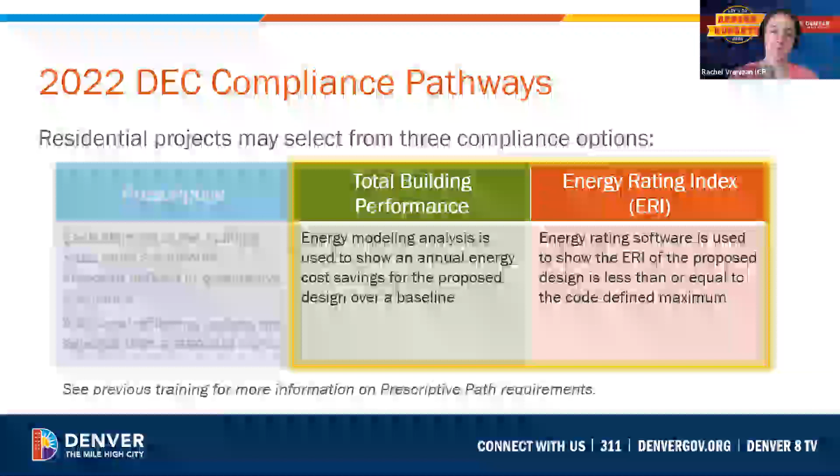Great, I have another question. Does an installed biofuel or ethanol fireplace meet the all-electric building requirements or definition? The definition for all electric properties does specify that any installed appliances or equipment that utilize combustion are not allowed. So in this case, even though you're not using natural gas, this is still a combustion appliance, so it would not meet the requirements for an all electric property.

But I did want to touch on that the definition for all electric property doesn't include any non-permanently installed things that use fuel. So say if you have a propane gas or propane barbecue in your backyard, or one of those propane heaters on your patio, that doesn't count towards this definition. We're really only looking at permanently installed equipment that uses fuel gas for combustion.

Thank you, Rachel. Good clarification. Let's see, we have another one on here.

Someone asked: 2021 IECC has a 5% cap on on-site power production contribution to the ERI, so is it even possible to get an ERI of 0 or less? Remember that the Denver Energy Code is not using the IECC Energy Rating Index score, it's using the HERS Energy Rating Index score. So you want to go into the Denver Energy Code amendment, and you'll see that requirement in IECC has actually been removed.

I wanted to add that there is a difference between your ERI for energy code compliance, which in the Denver Energy Code doesn't allow any on-site power production to be used towards that score - that's looking at just the house as it is without any renewables - versus that house's ResNet HERS ERI, which if it has installed renewables will still have an ERI that can be lower. So a house may have two scores when you're looking at renewables or not, and renewables just aren't allowed to be used for compliance with the ERI pathway.

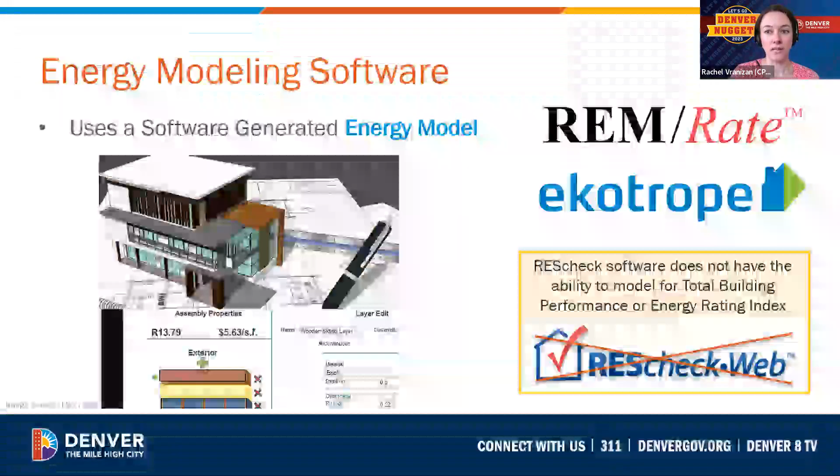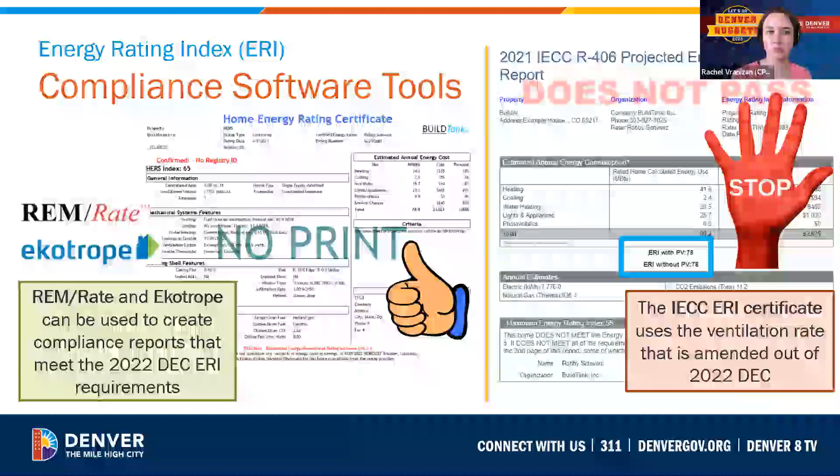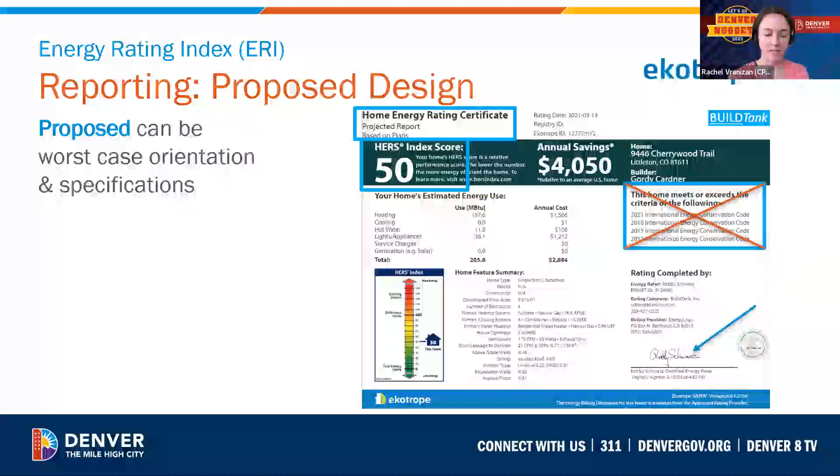So maybe Robbie, you can go to the slide about compliance documentation. For your permit submittal, you are submitting the compliance report, the modeling report that shows that you're meeting the requirements. There's also a section within the code that specifies everything needed to be included within that compliance report. Additionally, there's the table of requirements that you need to meet, which is what your third-party inspector would be looking at and verifying that you're meeting all those additional, mandatory provisions.

And I want to point you also to our energy code checklists. These can be not just resources for you to fill out at the end, but they can be really helpful resources to print early in your process and help guide you through all of the requirements to show that you're meeting every single provision. So it gives a lot more context on exactly what the reviewer will want you to include in the permit documentation.

And we will cover in the contractor inspector trainings in more detail what we will require before the certificate of occupancy is released. Just to quickly add to that, in the body of the software, Jeremy's question is basically saying there is a checkbox in the body of the software that says that these items have been looked at in the code. For the cost compliance report, you'll be submitting that.

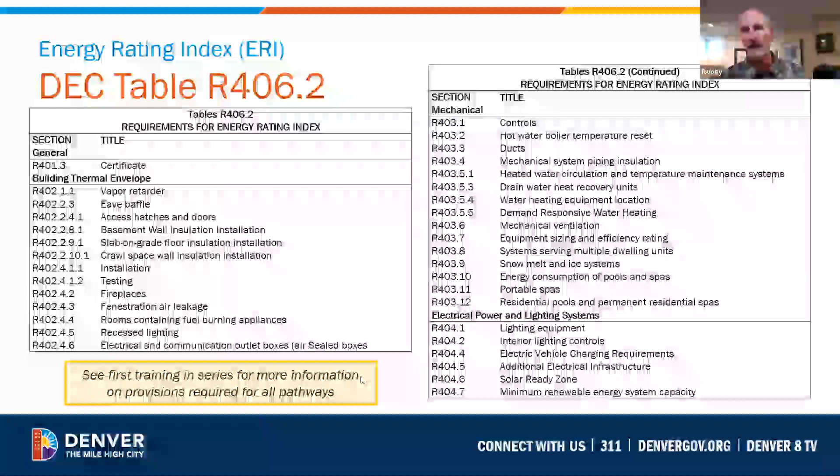And it will say on that report that these things have been met. For the energy rating index pathway, it really relies on field inspection and the code checklist to ensure that all of these provisions of the code have been met, because you don't have the ability to use that checkbox in the software for the ERI pathway for the city of Denver.

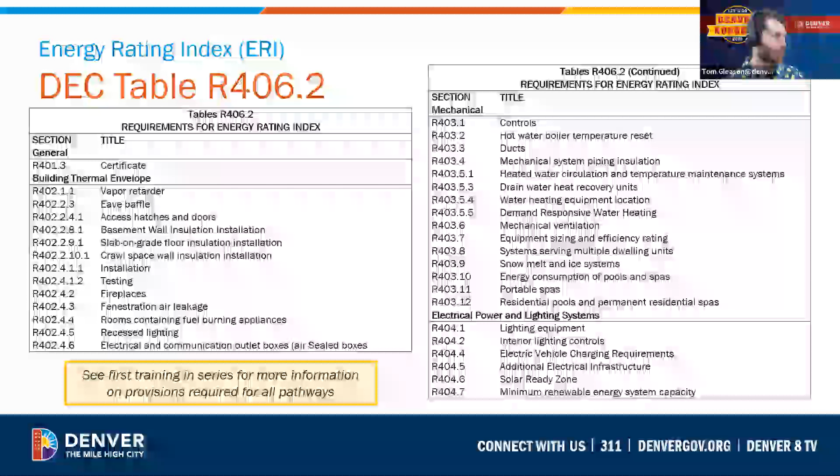So the last question is, someone has seen advertisements for leasing HVAC equipment. Does the Denver Energy Code allow this option for existing residential properties?

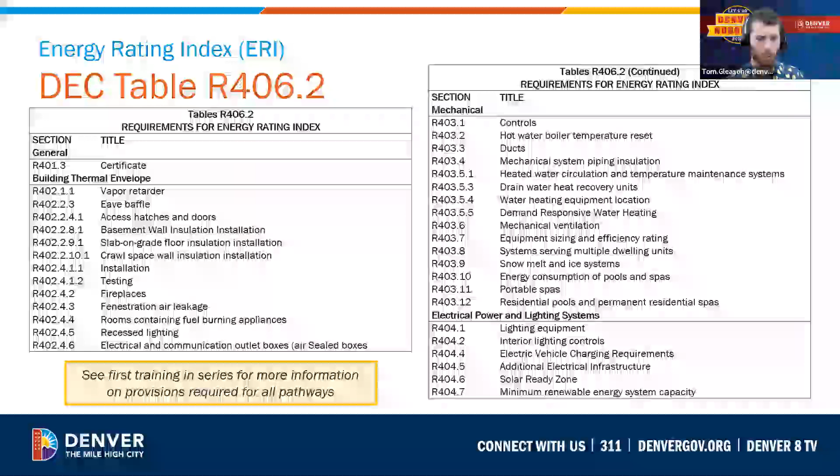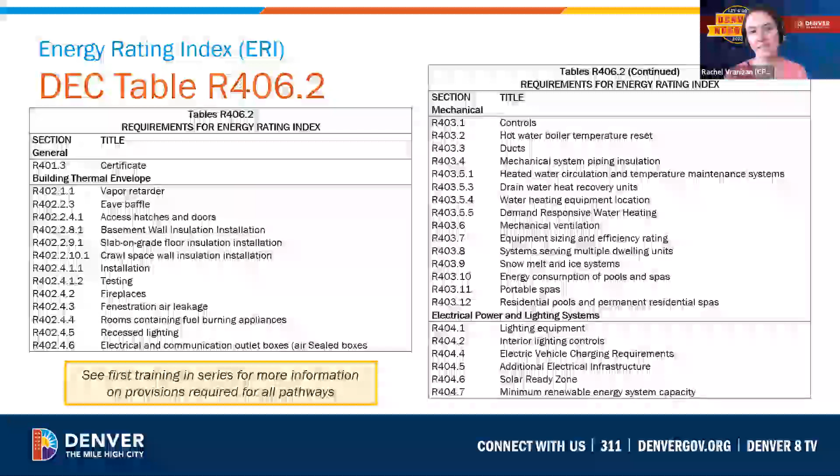The energy code doesn't really allow or disallow this or specify how equipment is paid for, but whether it's purchased or leased, it just needs to meet all of the requirements of the energy code. That would be the code standpoint for that.